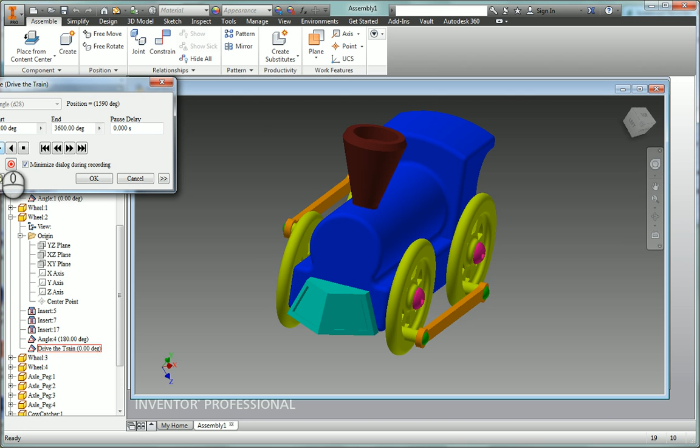In this movie we're going to attempt to assemble the train and animate it as you see going here. So this should be fun.

Okay, so what we're going to do is create a new file, and we want a new assembly file so we can assemble parts. Then we come up here and go to place, and you're going to try to find all your parts and stuff.

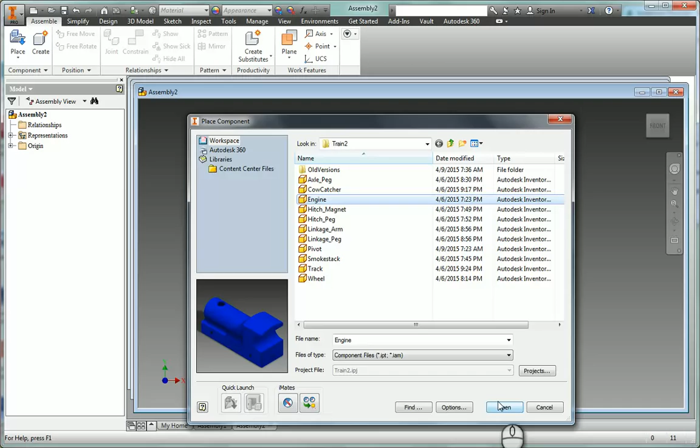The first thing we want to do is bring in the actual engine body. So there's that, I'll bring it in here, and you right click to set it, and then it gives you another piece, and then you left click to set it, and then right click and click OK. So you got it in there.

And if you look over here on the hand here, I can grab it, I can move it around. I could hit the rotate, and I could rotate it around.

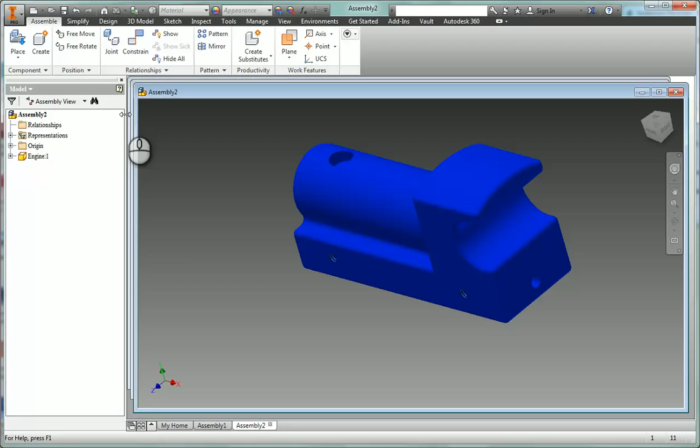We're going to bring in another piece to attach to it. I'm going to click place again, get the smokestack, and bring that in here. Left click, right click, OK. Then you'll see I can grab the hand, move both things around, and grab this and move these around. I can click on one individually like this and move it, or click on this and just move this around too.

Now I don't really want to do that. Whenever you place a part and start an assembly file, you want to take your first part that you're going to attach everything to and make it so it doesn't move around like this. You want it stationary or grounded. And that's very easy to do.

All we have to do, by the way, look over here. So here's our engine part. See, I brought our engine part in and our smokestack part in. I'm going to right click on the engine body and come down here where it says grounded, and ground that.

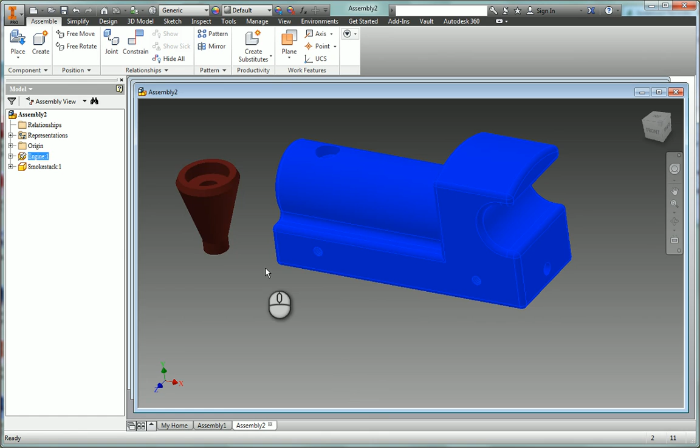Then you'll notice over here on the engine there's a little thumbtack, a little push pin there, which means that thing is grounded. So if I grab this, I can move this around, but if I come here, I can no longer move this around. I can still grab the whole thing and it's going to move all of it together, or I could rotate the whole picture together. But individually, I can move this, but I cannot move this. And that's kind of what we want.

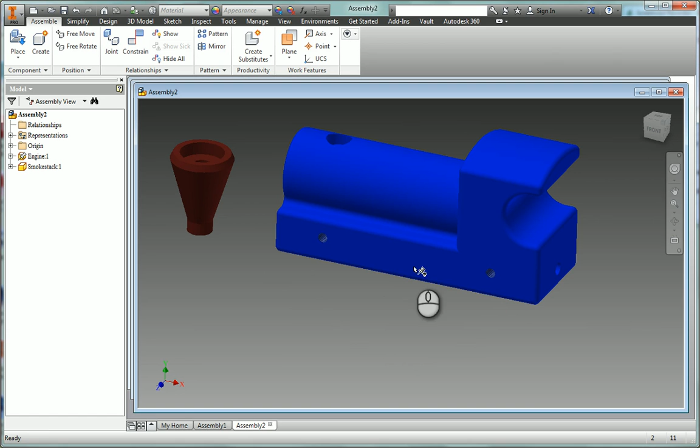Okay, so first thing we're going to do is put the smokestack up in here. Now there's several ways this can be done, this is all involving constraints. So I'm going to click constrain, and the one that's always defaulted on is this one here, called mate. There's a couple things you can mate, and I've seen people do it this way.

If I come over here and hover over this, you'll see I can get it so I have an axis. And I could come up here and get an axis too, and mate those axes together. Now that means the axis of this one and the axis of this one will be lined up. But I can still grab the smokestack and move it up and down along with that. I wouldn't be able to move it side to side or anything, but I'd be able to move it up and down on the axis.

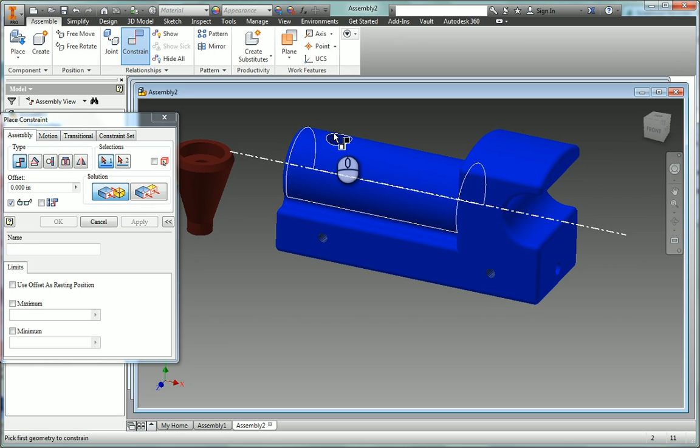So then what we'd have to do is another kind of mate where I'd grab that circle and maybe this bottom circle, or I could do this top circle and that top circle there or something. I could do the bottom circle, rotate a little bit and get down there, and then that would mate those two faces together.

But what I like doing instead of using both of those is using a different constraint called insert. So I can insert this, and it does both at the same time.

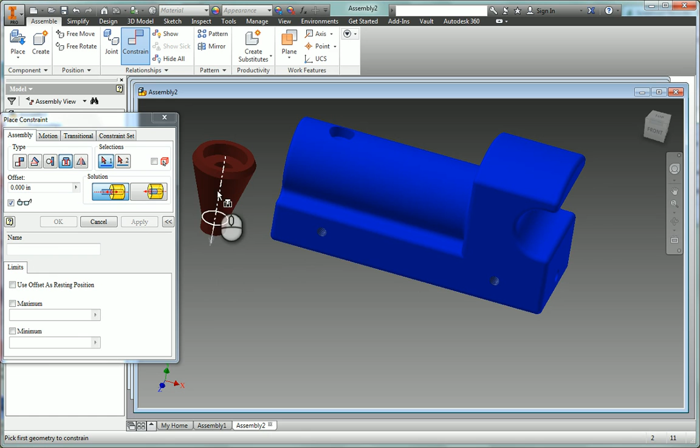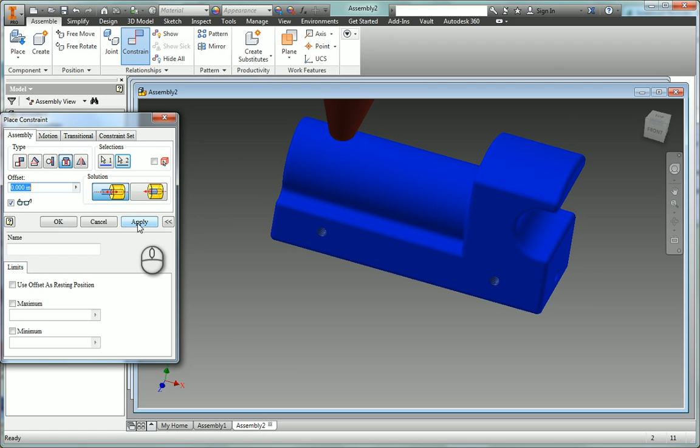If I hover over here, it has the circle and the axis highlighted. It's going to mate the axis and the edge here to the hole at the same time. You'll notice there's an arrowhead pointing down, so it's going to put it down in. I'm going to grab onto that, come up here, and see if I have that hovered over. I got the axis and that bottom circle, click that, you get a nice sound that helps you feel good. Then I click Apply, and now I have that smokestack in there.

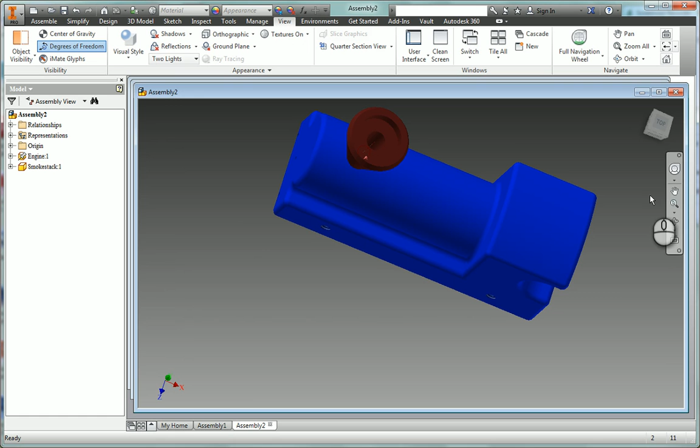Now, one thing we might want to do, and you might not like this so you can turn it off: if you go under View, you can click on Degrees of Freedom. That shows you how many degrees of freedom we have around various things. Before I did that constraint, you would have seen little green arrows all over this, but now you just see a rotation thing, meaning that if I grab onto this, when I pull it around, it's actually rotating.

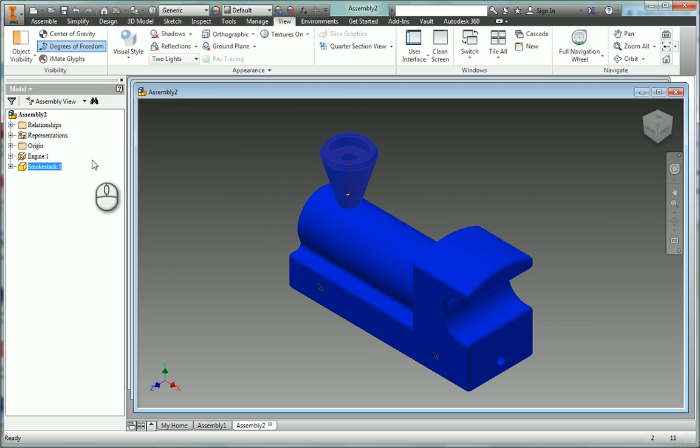You can see the edge kind of doing that, so it's rotating, which isn't a big deal, but how do I get it to stop rotating and completely have that out of the way? Well, I could come under the smokestack, under the origin, and look at the planes here, getting this plane that goes right down to the middle of the smokestack. If I right click on that and turn the visibility on, I'll be able to see it, so I can do another constraint here.

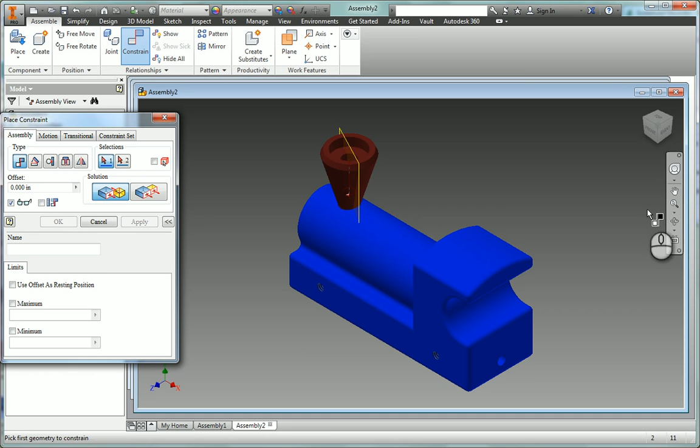I can go to Assemble, do Constraint, and do what we call an angle constraint — we're going to use a lot of these too. I can do an angle constraint between different planes and have them be 0 degrees, meaning they'd be parallel, or 90 degrees, meaning perpendicular, or whatever. So I'm going to rotate this around a little bit and click Angle Constraint. Now here's the thing you got to watch: you got to click this first one, it's not defaulted on that. We could probably do that, but I'm going to have to default it on and get it on that one.

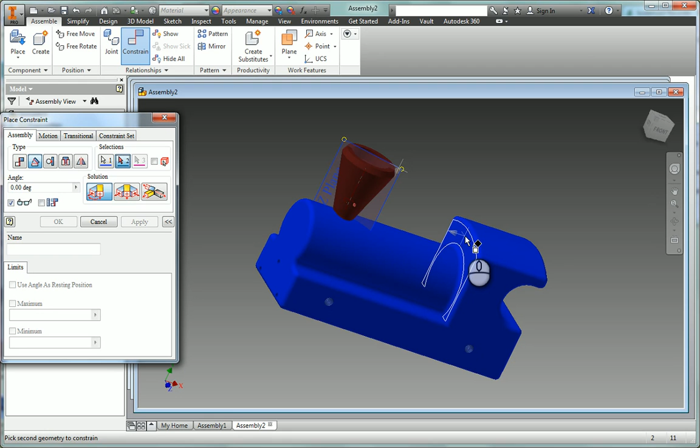Then you come up here and click this plane, and then click another plane on the body of the train somewhere. I'm just going to click this face right here, and right here the angle between those is 0 degrees. I can put in anything I want — it wouldn't really matter what I put it at. But then this plane is going to line up at that angle with that particular plane, and all that does is keep it in place. So if I click Apply on that now, this thing will no longer rotate — it doesn't have the little spinny thing on it anymore.

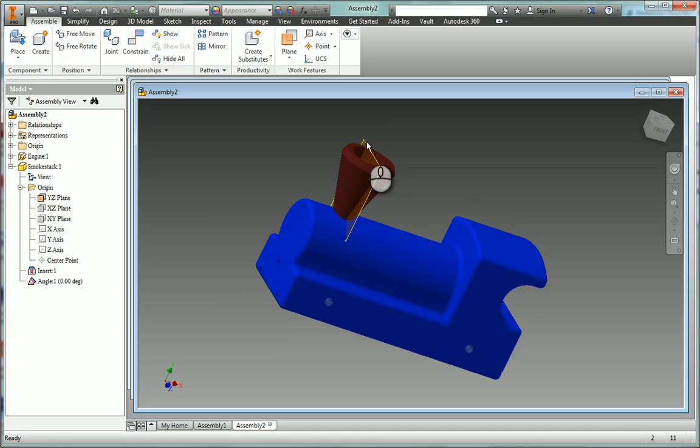I'll close that. I can come up here to the plane, and if I can zoom in here and get just the plane, which I'm having a hard time doing — I'm just going to go over and grab the plane here, right click on it, and turn off visibility so it's not there anymore. Now if I grab this, it won't rotate around anymore, so I've completely constrained it. It's not a big deal if it rotates, I guess technically, but okay.

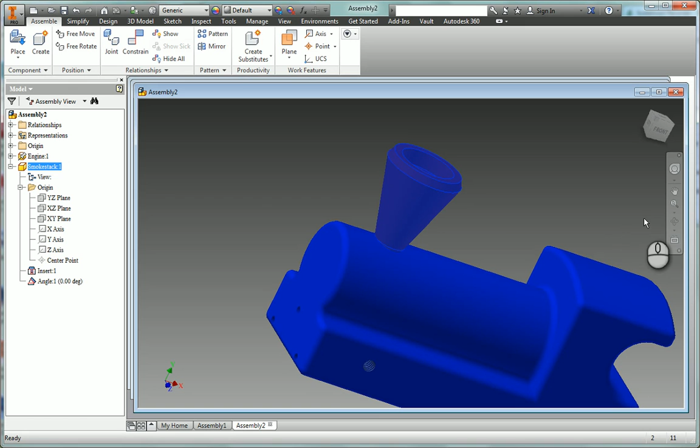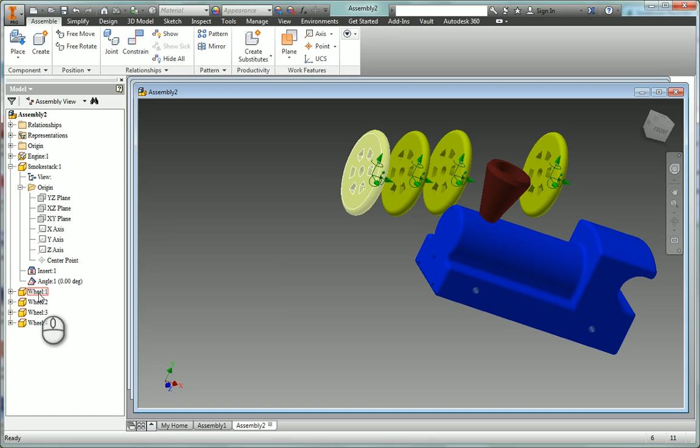So we got the smokestack in. All right, let's put on some wheels. I'm going to place, and grab a wheel, open, and of course I need four of these. One, two, left click, right click, okay. We're going to put these wheels on here, and this flat side is the side that goes on here. So again, you could mate an axis, and this flat side and this flat side, or we can just do an insert — even though we're not technically inserting something here, I can use an insert and do that in one step rather than in two.

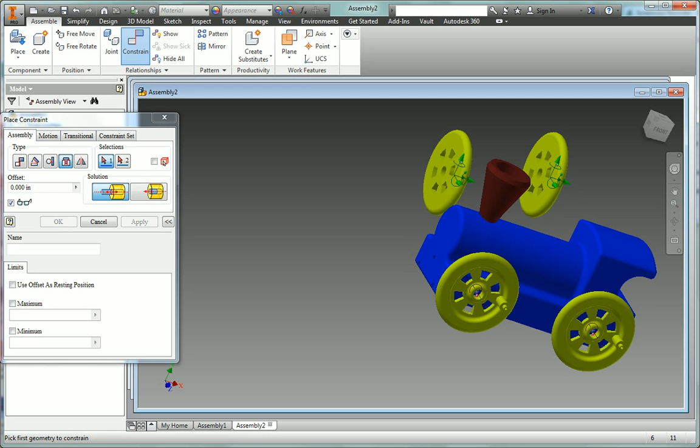So I'm going to click Constrain, click the Insert tool, come here and go up here and get the axis in that circle right there. And I'll come here and get the axis in that circle right there. Apply it. Then I'll get this one and that one and apply that one. And then we probably got to turn this around.

And I'm going to do that one and that one. Apply, you got to hit apply every time. That one and that one. Apply. And good, I got my wheels in there. Now these wheels should rotate, see, they can spin around. But that's the only thing, I can't pull it off or move it in any direction. The only thing I could do is spin it around.

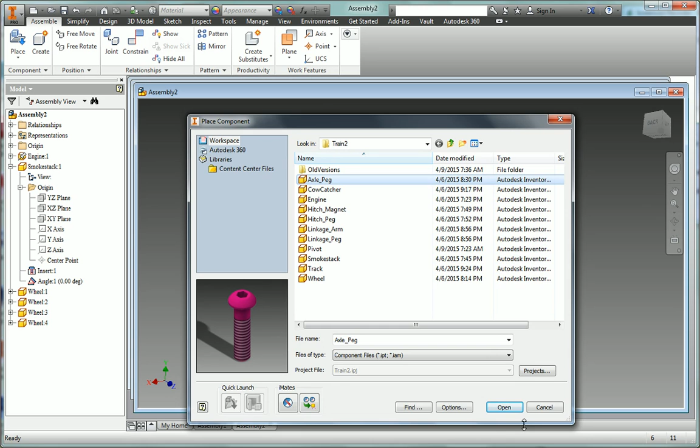Okay, so we got our wheels in. Let's put in the pins, the axle pegs in there. Place, axle peg, that's what I want. I want 4 of those. Left click, left click, left click, left click, right click. Okay, got 4 of those.

We're going to constrain. We're again going to do insert to save a lot of time. I'll go all the way up to get that bigger circle there, and then I'll come here and get the biggest circle. I don't want to clear out that, I want it like right there. Apply.

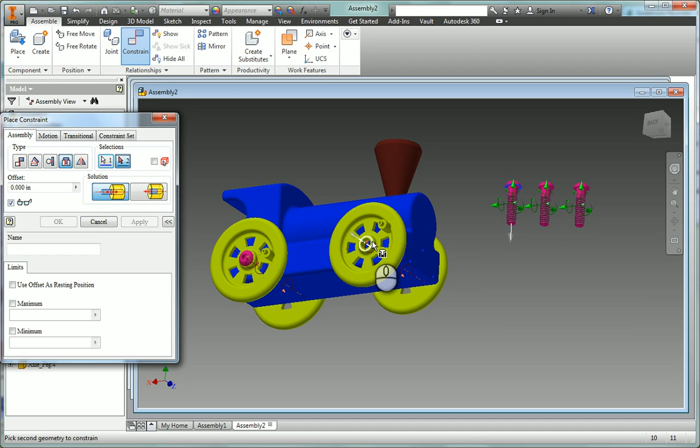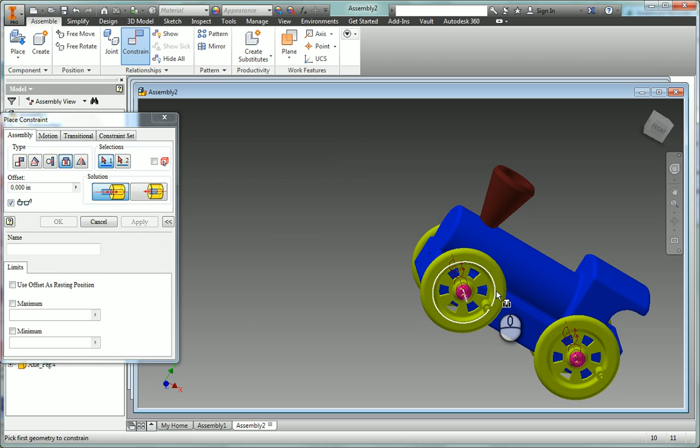There. Apply. Spin it around. Apply. Apply. Okay, and if you zoom in here, you'll see a little circular thing on there, which means that we could take that and we could still rotate that thing, which is fine with me. I don't care that it's rotating, it's gonna be fine. Okay, and the whole wheel still rotates. All right, so we got those in.

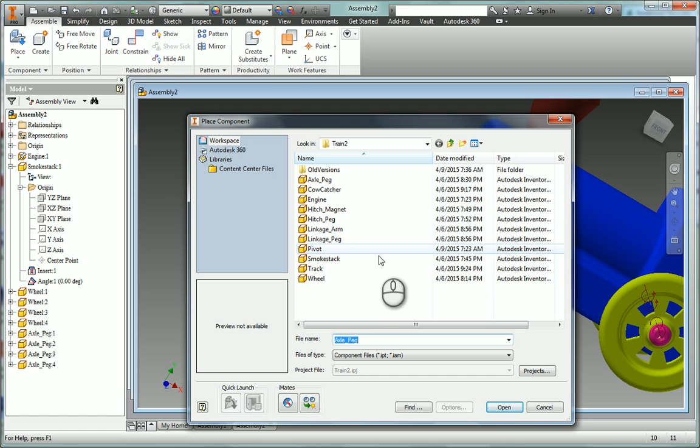Let's put the cow catcher on. Place the cow catcher, and of course you'll probably be putting on your cool cow catcher that you have designed. Right click, or left click, right click. Okay, so this would be kind of tricky. I got... and you can always come up here and do free rotate and rotate an individual thing.

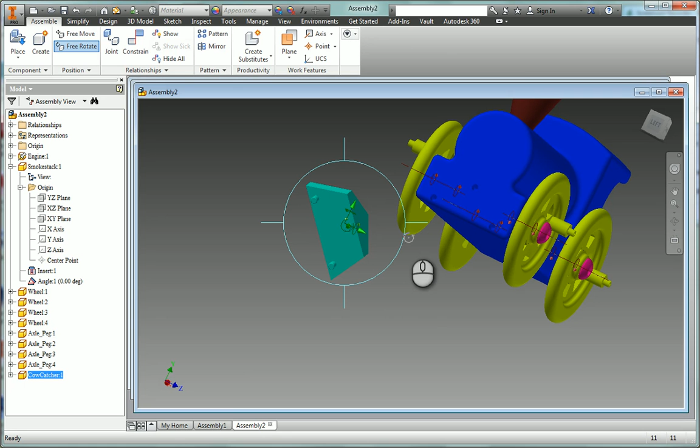And you can do this no matter what, even if you inserted it. And it looks scary because it looks like it's messing it all up, but it's not. It'll always go back to what your constraints were.

So I need to put that pin in that hole there. That one there and that one there. So I'm going to do an insert, constraint, where's constraints? I'm going to do insert, and I'm going to go all the way to the back edge, and then come here on the front edge, and that'll put it on there. Apply, and see, now this is why you get scared, because now how do I get those other ones?

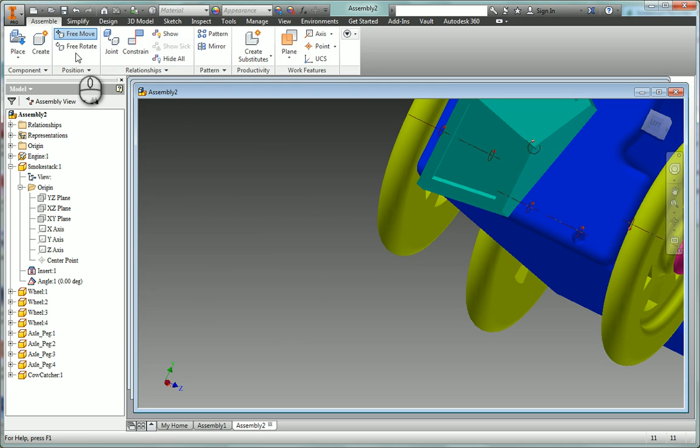Well, I can just grab the free move. I can grab it, pull it out here. I do the free rotate, rotate it around, and then you're saying, well, I had it in there, but it's still going to go in there. It's fine. Watch, constrain, and I do an insert, and I'm going to do this one, and that needs to go in this hole right there, and apply it.

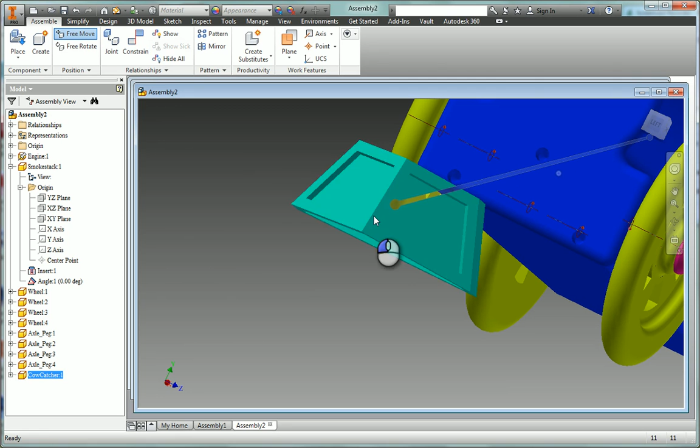Okay, and then I'm going to grab it again, move it out here, rotate it, and now I got this last one, constrain, insert, that one there, and that one there, apply. Okay, there we go. So there, I got that on there, and I can grab it, and I can't get it to come off at all. So that's really good.

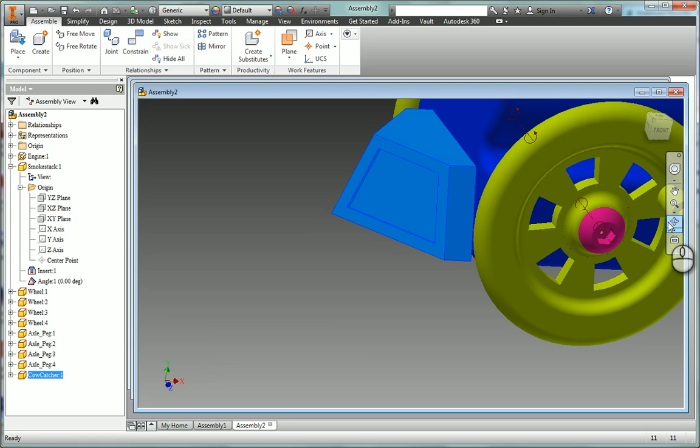Cow catcher's on. Okay, let's go around the back of this thing and put on the hitch stuff. Hitch magnet, open, and let's go ahead and get the hitch peg too.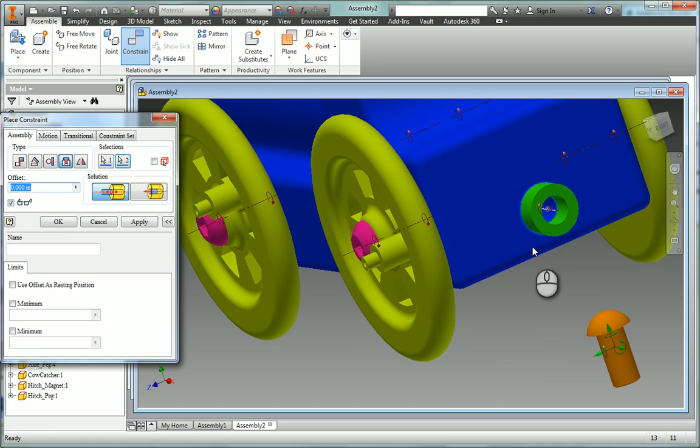Okay, constrain, we're going to do insert. I can grab that whole face, put it right on there, apply, and then I can do an insert and get that whole thing there, apply. Got those on.

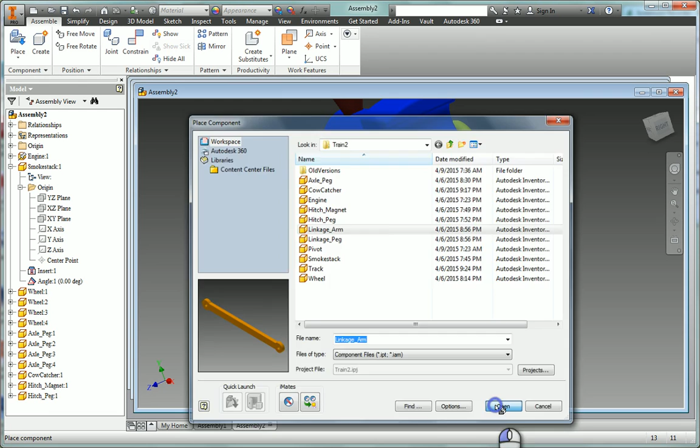Okay, now what do we want? Now we have a linkage arm. Place, we need two of the... oh, that's linkage peg, linkage arm. Open. Left click, right click. Okay, and we're going to try to put these on these things here. So, let's free rotate one of these. Like that.

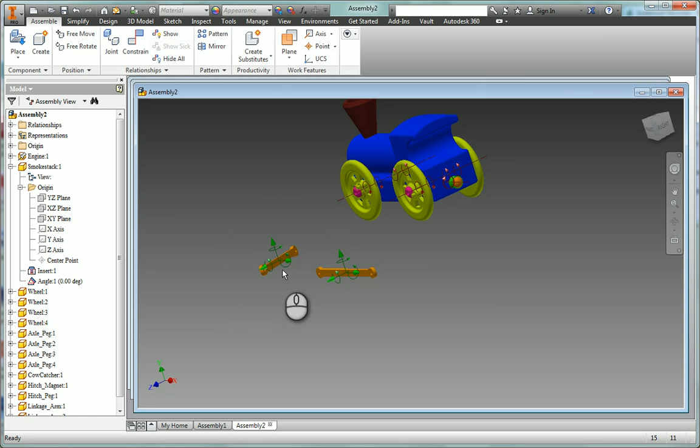Zoom in here a little bit. Constrain. Insert. We're going to grab that hole there, and we're going to take it all the way to the back here. Apply that. We can move this back out. Rotate it out a little bit.

Constrain. Insert there and there. Apply that. Okay, while I'm on here, let's go ahead and put the pegs on. So place linkage peg. I need 4 of those.

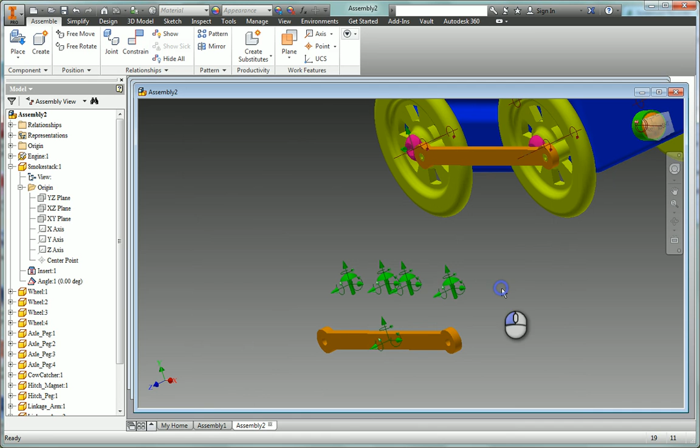Constrain. Insert. Go to there. Let's go, come on, come on, come on. That's good. Apply, insert. There's another one. There. Apply. And let's escape out for a second.

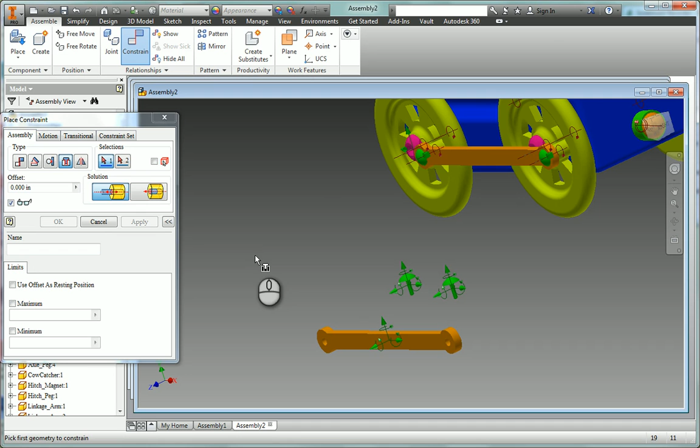So now I should be able to grab this linkage arm and it'll go around. It might not stay perfectly horizontal. Sometimes this part will go up this way, and then you kind of do a figure 8 kind of thing. I could probably have hooked it on that way, but we're going to fix that anyway, no matter what. So now I got this driving around.

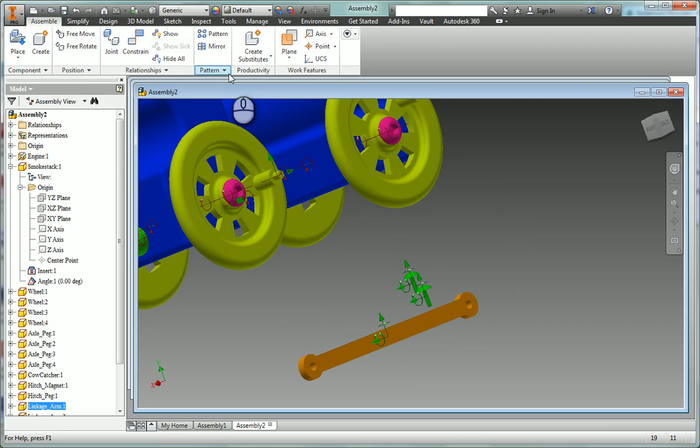Okay, let's go to the other side and fix it all up. Let's do constrain, insert there, and there. Apply.

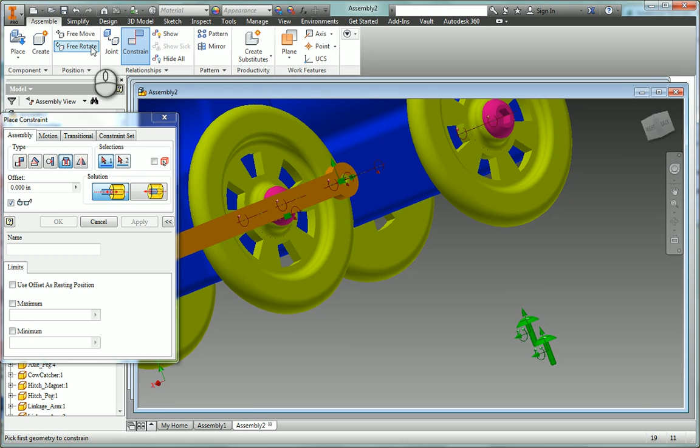Well, let's just move it. Rotate it. And you can lose track of which side you're doing. That side, and that should be good. Apply, insert

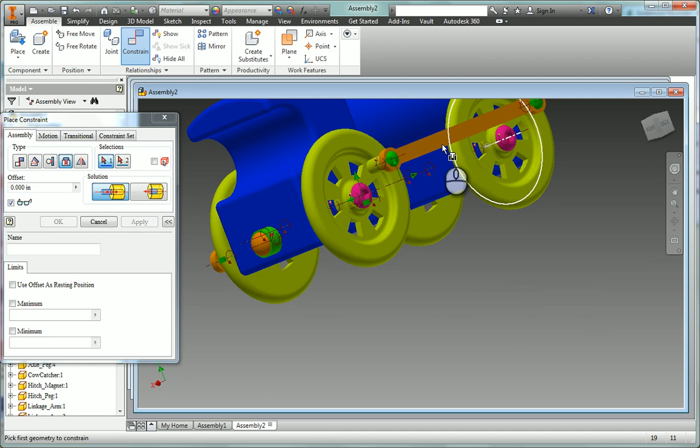that on there, apply, insert that on there, apply, and we'll close that out, and this thing should now be going also. Okay, good. Good, good, good.

What did I do? There we go. Okay. All right. So now what I have here, we're almost done here.

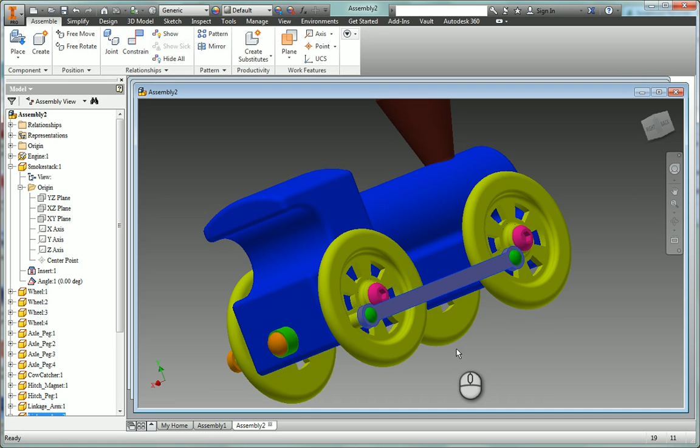So if I take this and I rotate this around, sometimes this doesn't work very great, and sometimes this part will come up and it'll be kind of at an angle, and I want these always to be flat like they are right now.

So the way I can do that is pretty easy. I can just kind of come up underneath here, and I'm going to do a constraint, and I'm going to do, if you remember, an angle constraint with different planes. Remember, I got to hit on this first one, and I'm just going to come under here and click the bottom of the train.

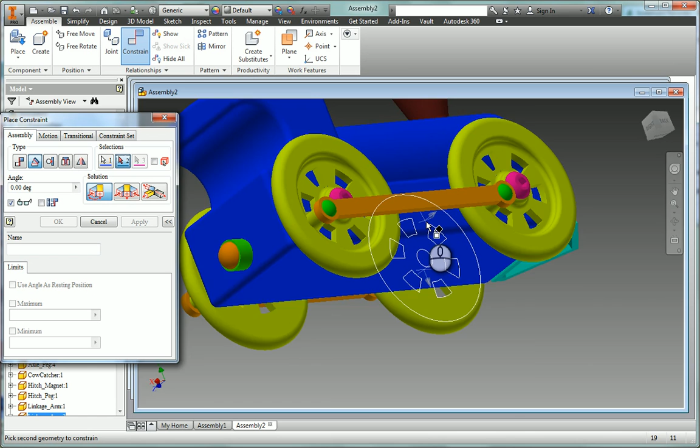And I'm going to come up under here and click the bottom face of that thing right there. So the train's always going to stay this way, horizontal, so that means this is going to be constrained to be exactly horizontal too, as long as I keep 0 degrees in there. I apply that, and that'll always keep it that way.

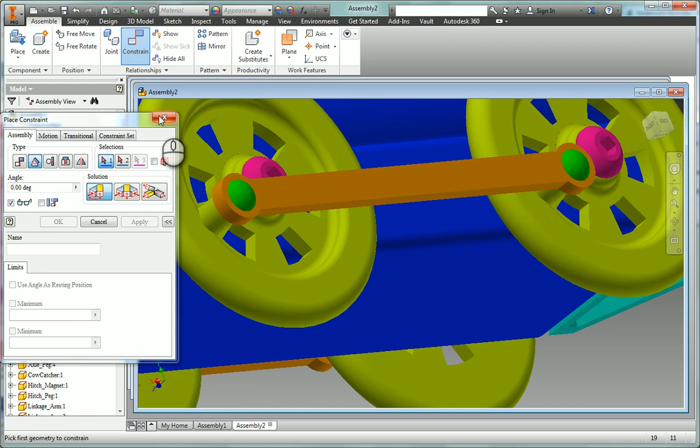That's good. I could do another angle constraint between the bottom of that one and also the bottom of the train. Apply that. And so that's just going to keep them always horizontal to each other. Some of you might not ever notice that problem again, it might not flip up on you, but it's going to work a lot better if you do that.

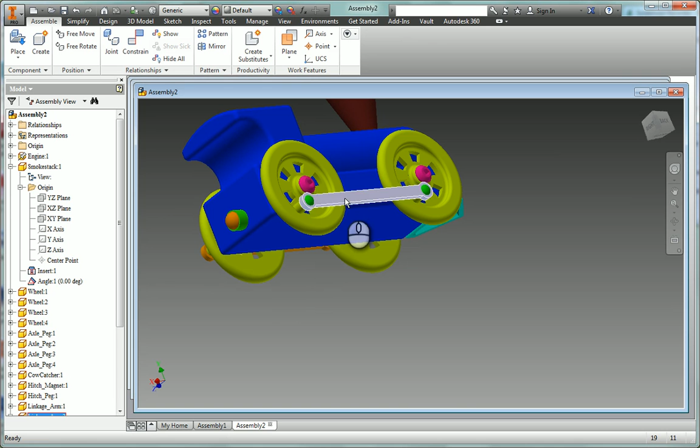Okay, the last thing I would like to do, well, I guess not the last thing, but I'd like to be able to tie this one with this one. So when I'm turning this around, the other side turns also. So the way I'm going to do that is let's try to turn this around so I can see the front.

Okay, so I'm going to come down and open up a wheel. I got 4 wheels here, but they're all the same part technically. But when you're doing assemblies, they label them all as different things. So if I hover over a wheel, that's wheel 1, and there's wheel 2, wheel 3 is up front, and wheel 4 is in the back. Doesn't matter which one I open up right now.

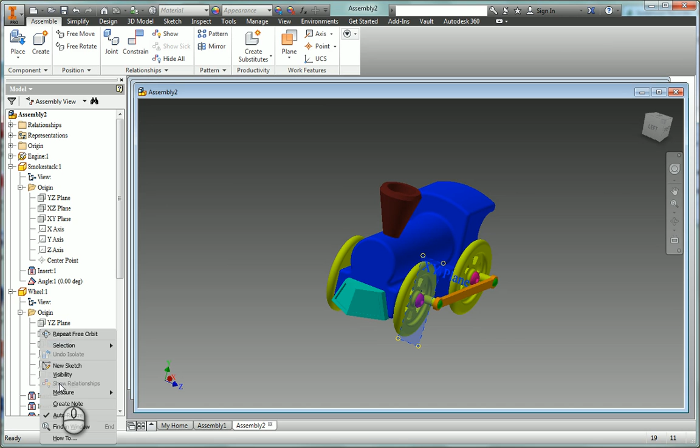I'm going to go to wheel. I'm going to look at the origins, and I'm going to look at one of the planes that's going through it, like that one, the XY plane. And I'm going to right-click on that and turn the visibility on. Now you notice when I did that all the planes showed up on every wheel. That's because the wheel is the exact same part. So if I show a plane on one wheel, it's going to show it on all the other ones too. So what I want to do is, when I'm rotating one of these, like if I'm rotating this side or this wheel, this wheel is tied to it so that both of those will move.

I'd like this one to also have the back sides moving too. So what I can do is an angle constraint between this plane and this plane. So when I'm moving this around, this plane is rotating, and this plane would have to rotate at the exact same angle, causing this other side to rotate also. Hope that makes sense, it's kind of confusing.

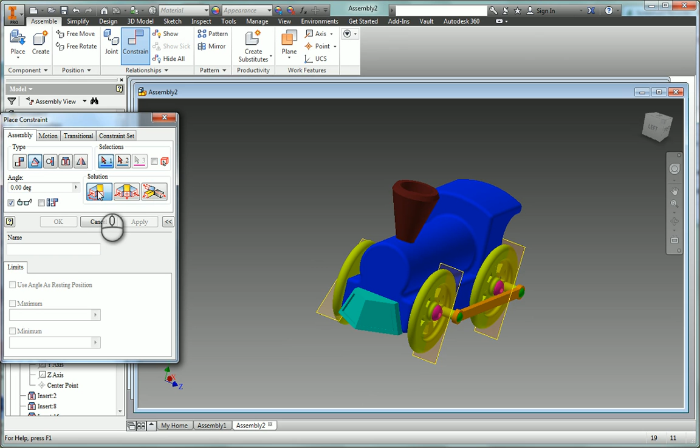So I click constrain, I click the angle constraint, and I click this one. Remember, I always click that first one. Then I'm going to constrain two planes at the same angle. So I click that plane right there, come over here and click that plane, and you'll see it did it at 0 degrees. So if I now rotate this, the other one would rotate also.

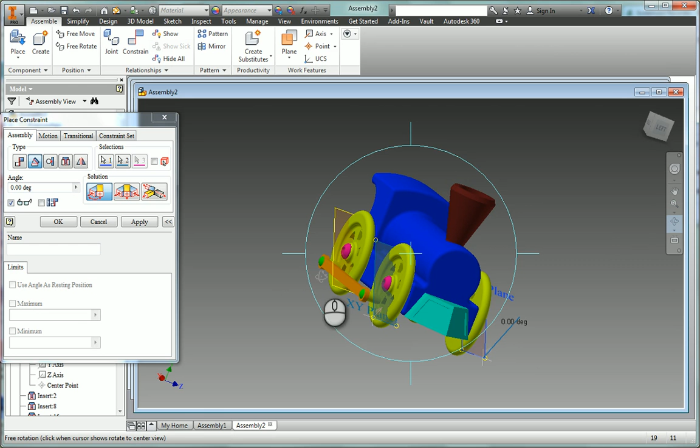Now before we do that, let's look at here. See, this linkage arm is on the bottom, and this linkage arm is on the bottom now too, right? You can leave it like that if you want, but I prefer something a little different. I don't want these things to be parallel going around. I'd like this one to be on the top when that one's on the bottom, so it's like a chugga chugga chugga kind of thing.

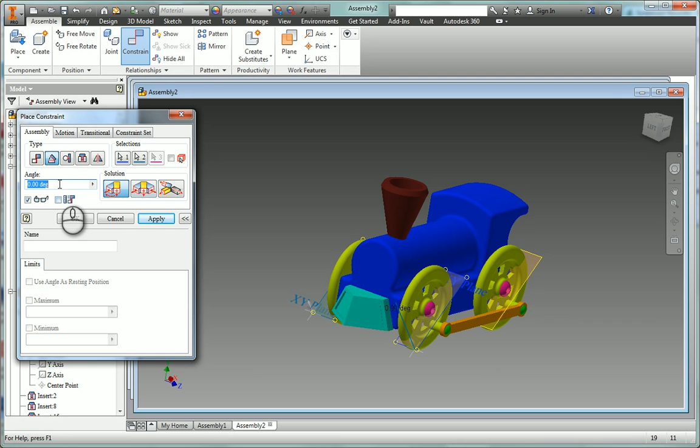So the way I'd do that is, right now these planes are at 0 degrees. What I need to do is have the angle between them be 180 degrees. So I'm going to take one of these planes and turn it all the way around, turning this wheel halfway around so the plane's basically upside down compared to what it is right now, which would be 180 degrees off of this plane, so this will be up on top. I can just come here and change it to 180 degrees.

See how it turned that wheel around half a time, so the plane's upside down now. It's 180 degrees off of this one, and my linkage arm's up on top while this one's on the bottom, and I just like it that way. So I'm going to click apply on that.

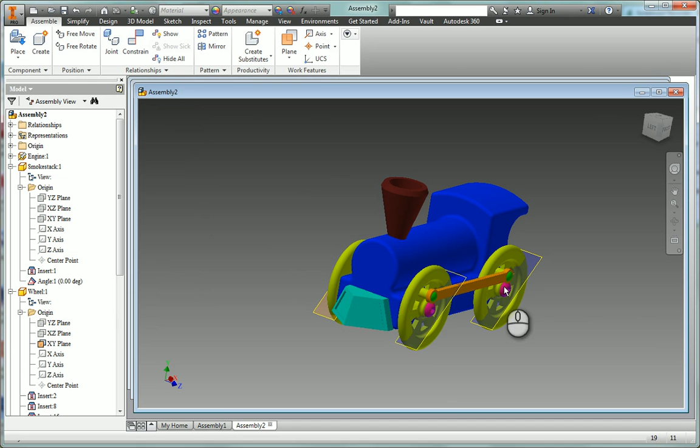I can come down here and right click on the... well, I'm going to leave the planes on for now. But if I come here and grab this, see, now they're going. Let me move it over a little bit so you can see the other side better. So if I turn this around, the other one's going to be turning kind of opposite, so there's one up on top while the other one's on the bottom.

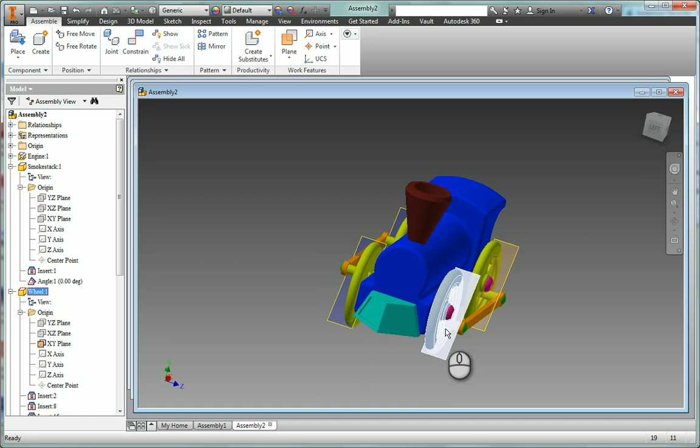And that's because these planes are not at 0 degrees. They look like they're at 0 degrees because they're parallel to each other, but one's flipped compared to the other, 180 degrees off.

All right, so the very last thing we want to do is I want this to be able to do this by itself. I don't want to have to come here and grab this and turn it around to show people how it works. I'd like to click a play button and have it be moving. So I need to add one more constraint in, and this is going to be another angle constraint. Now I have it set so that if I turn one wheel, the other wheels all turn, right?

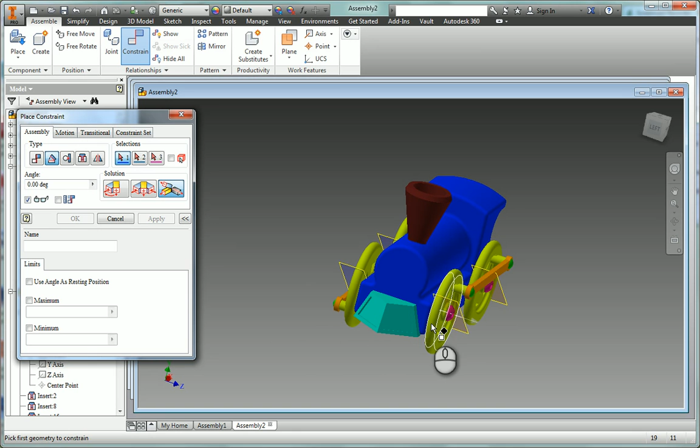So what I'm going to do is constrain the angle of this plane here to the engine body, like this plane right here. I'm going to click angle, make sure you're on the first one. I'm going to click on it, and it doesn't matter which plane you do, you just have to do one of them. So I'm going to click that plane, and click this engine body right there, and right now it's on 0 degrees, so it lined up all these planes with the front of this thing.

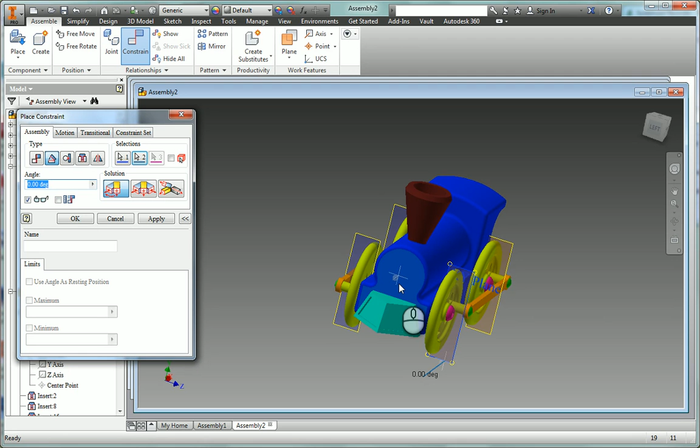Now what I'm going to do on this one's a little special. I'm going to come down here in the name section.

If you can't see the name section, click on this button right here and drop it down like that. I'm going to click on the name section and call it drive the train. I'm going to give it a name because I'm going to use this constraint to drive the train. Then I'll click apply.

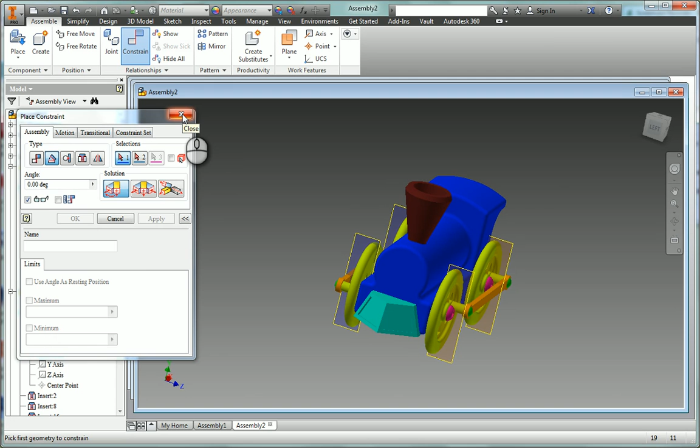Now at first you might not like this. Let's close that up. If you come under wheel 1, you see drive the train. Under wheel 2 you won't see it because it's there already, but you'll also see it under the engine, because we did the constraint between the engine and that plane. So you'll see it under wheel 1 and under engine 1 — either one is the drive the train constraint.

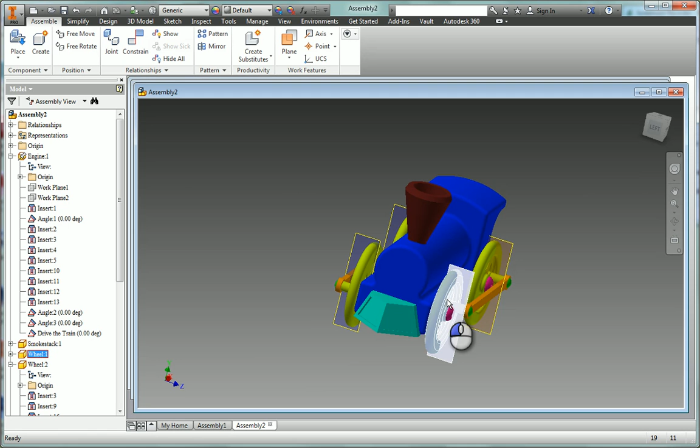Now at first this might seem like no fun, because if I come over here and try to grab the wheel and turn it, I've lost the power to do that. I can't just grab it and make it turn, which was kind of cool, so now people are upset. The reason it won't turn is because this plane and this plane are tied together — they have to be 0 degrees, so I can't move this because it's locked into place at 0 degrees.

But what's cool is I can now go over to drive the train, right click on it, and under the constraint you'll see 'drive.' I'll click on drive, and then click this little button here too. You'll see it's going to start at 0 degrees and go to a 10 degree difference between the planes.

So what's that going to do? If it's right now at 0 degrees and this starts to go toward 1 degree off, 2 degrees off, 3 degrees off, it's actually going to drive this wheel around. Now 0 to 10 degrees isn't very far. Let's say I want this wheel to go around one whole time — that would be all the way up to 360 degrees.

Down here you'll see an amount of value, that increment — it's going to go by 1 degree increments, so 0 degree, 1 degree, 2 degree, 3 degree, 4 degree, and it's going to go around and drive it. So I can go from 0 to 360, turn it around once, and just click play and watch the magic.

So see, it's driving the constraint. It's taking this plane and this plane, which are at 0 degrees right now, and saying let's change that angle over time. So 1, 2, 3, 4, all the way around 360 degrees, and it gets back to the same place.

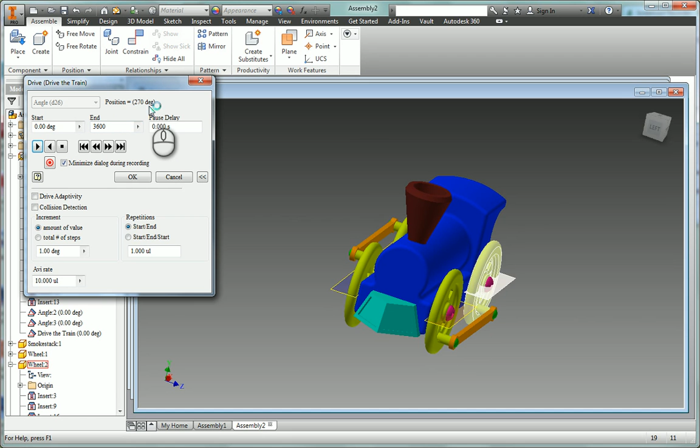What if I want this to go 10 times around? Well, that'd be 3,600 degrees. I've got to click the all the way back button, then click this, and there it goes. Up here you'll see the position — see, it's 300 degrees, 400 degrees, it's on its second turn, 500, 600, 720 right there — that's 2 times around. And that'll go all the way to 3,600 degrees, which will be 10 times around.

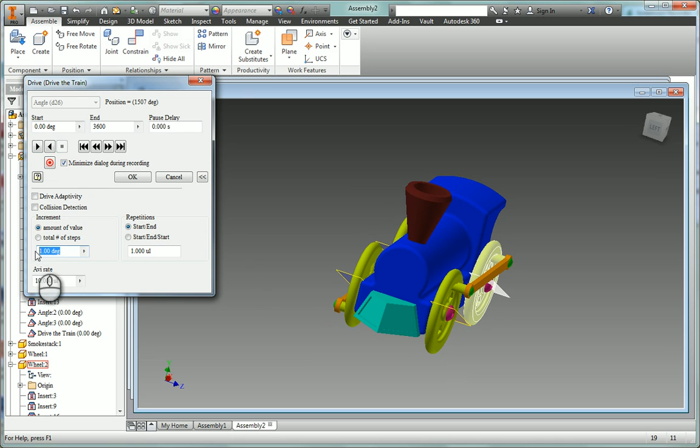I'm going to stop that. What if I want this to go faster? It's going too slow for my liking. Well, you come down here and just change the increment — instead of 1 degree increments, let's go 5 degree increments. Click all the way back and hit play. There we go, now we're going faster.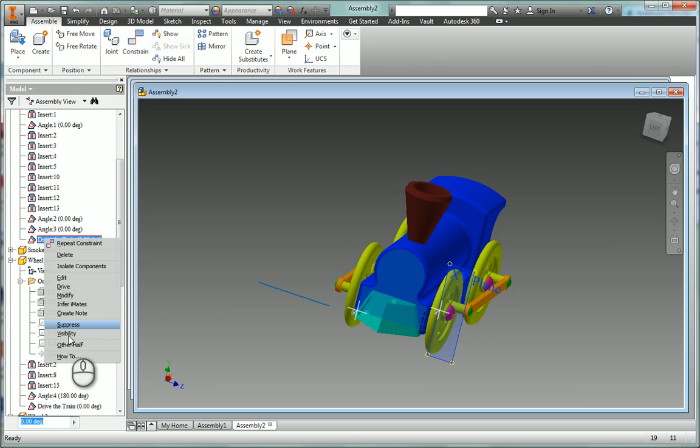So I can stop that and close this out. Maybe I don't want to see those planes anymore, so I'll come down to the wheel — wheel 1 is where I had it turned on. I'll right click on that and turn the visibility off. Then I come back up here to drive the train, right click on it, and drive it.

I don't want to see that plane on there. I can change my increment to go really fast — let's go 10 degrees. Here we go, there we go, chugging right along. Okay, so that's how you assemble your train and animate your train.